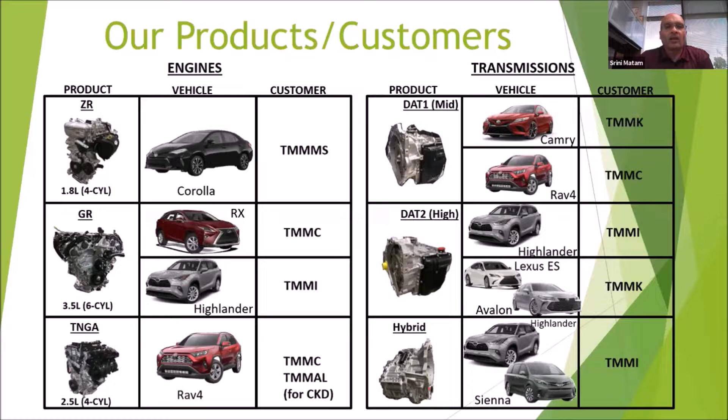First, I'd like to give an explanation of what our goals are for the environmental challenge of 2050. We have 6 challenges. The first one is we want zero CO2 emissions for new vehicles. The second one is once the vehicle is in the field, for the life cycle of the vehicle, we want zero CO2 emissions. Also within the plant that's making the vehicles, we want to be CO2 neutral.

Challenge 4 is protect our water resources. Challenge 5 is ensure all Toyota facilities and processes support a recycling-based society. Challenge 6 is everything we operate and make, we want to live in harmony with nature. That's our goal. With that said, I'm going to touch on 2 challenges and then lead into the STEM discussion.

The second challenge I want to share is the plant side, zero CO2 emissions. We invested $4.8 million in the largest solar array. You can see on the picture on the right that generates 2.6 megawatts of total electricity that we use within the plant. It doesn't support all of it, but it supports 25% of our electricity that we use.

So now back to all of that effort that we're putting in. It has a big connection to STEM careers and how we use these technologies, and how our maintenance and engineering folks support these systems. First of all, from a STEM career standpoint, we have accounting and finance related to manufacturing, information systems, skilled maintenance, and then several engineering disciplines. I'm not going to read all of it because of time. Today, what I'm going to do is touch on skilled maintenance, leading to what Hannah talked about earlier, the advanced manufacturing technician.

Hannah, by the way, I was one of the board chairs of Bridge Valley until summer this year, and then I retired, and now I have a new member supporting Bridge Valley, a great institution, and we partner with Bridge Valley to promote the advanced manufacturing technician.

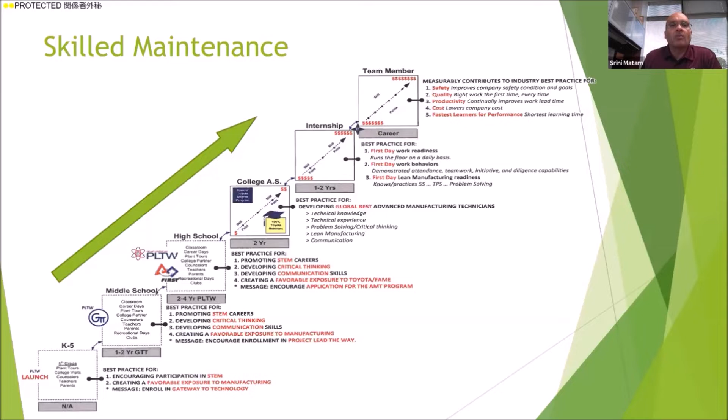I think Bridge Valley is the one that administers all of the AMT programs. So Hannah already explained about the AMT a little bit. And then you go into the associate degrees here through Bridge Valley, especially for skilled maintenance. It's called Advanced Manufacturing Technician. I'm going to go more into how that program works in a little bit. And then you do the internship.

It's a paid internship, and you become a potential team member here in the plant. Now, how does the AMT program work? Students basically work 2 full days of classwork at Bridge Valley, and then they work here on the plant 3 full 8-hour days. The instructional program continues through the summer. There is no summer break.

Here's how the weekly schedule looks. For example, on Monday, Wednesday and Friday, they come to Toyota to be on the production lines to support our maintenance folks. And then on Tuesdays and Thursdays, they go to school.

Here is the general idea about the degree program. You have general education with math, writing, science, social science, and public speaking. It's a 5-semester course. Then you get into the manufacturing floor experience with production and maintenance and so on and so forth. We also teach safety culture, workplace organization, lean manufacturing, problem solving — very important — and maintenance reliability.

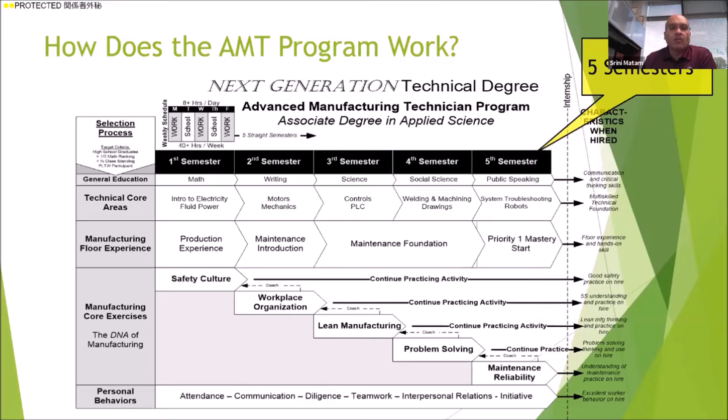So the program results, at the conclusion of the 5-semester program, students are going to get an associate degree in applied science, with 65 college credit hours and 14 months of real world experience because they've been working 3 times a week in the plant. And many other experiences highly sought after by employers — for example, problem solving is one of the key things, critical thinking, and safety.

So far we're having 100% job placement of the 2-year graduates from AMT. AMT's pass rate on Toyota's tough technical test is also 100%, along with 100% completion of the lean manufacturing core program, and professional behaviors as well. So a lot of good programs.

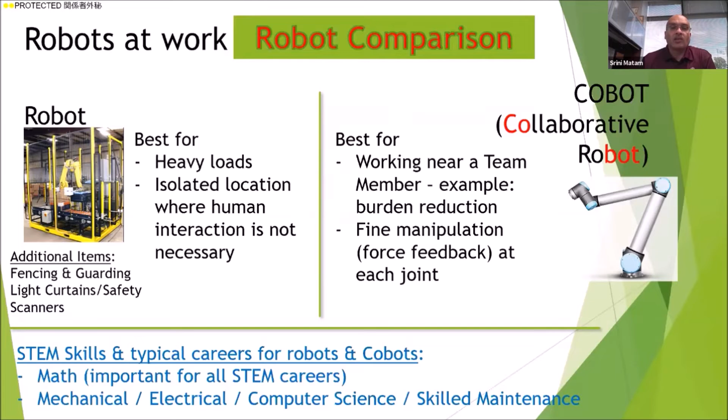Now I'm going to introduce what type of technologies we use in our plant, that either an AMT program or general STEM education through engineering could lead to job possibilities in the plant. For example, we have robots doing work in the plant. The one on the left is a heavy load robot that lifts a lot of weight, so humans don't have to, but there's a lot of need for programming these robots. On the right, you see a collaborative robot, which is human-friendly, two different types of it. For this, math is very important, along with mechanical, electrical, computer science, and skilled maintenance knowledge.

I'm going to demonstrate one of the small robots here with a video. What this is doing is wiping a part clean, so humans don't have to touch it and get cuts on their fingers or anything. This also helps glue an aluminum part to another part of the assembly. That's how this robot works.

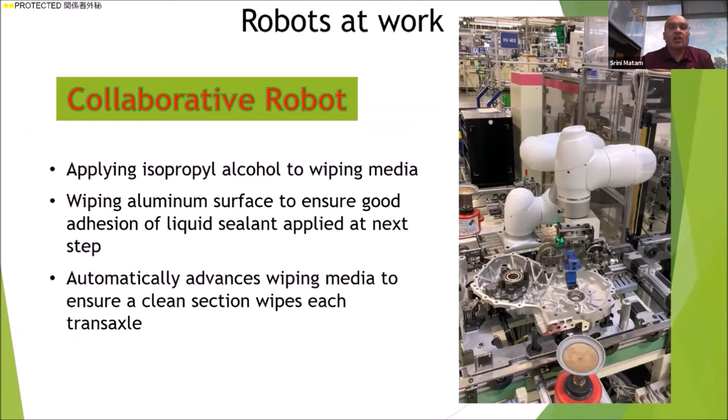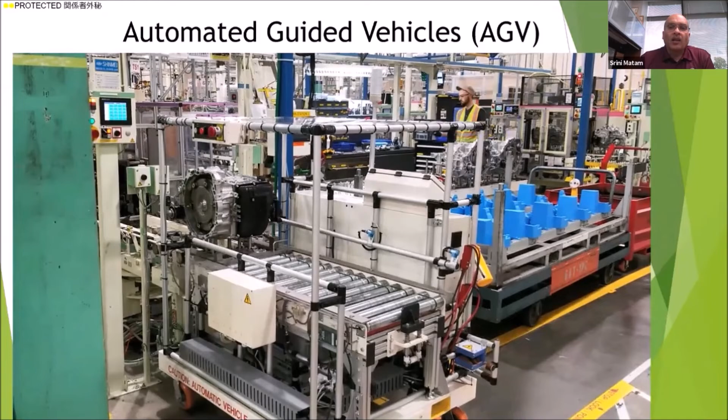There's a lot of need for programming these robots, and these skills are taught during the AMT associate degree program. Here is another example: programming an automated guided vehicle. Basically, it picks up a finished product, and once it's loaded, it automatically takes it to the next line.

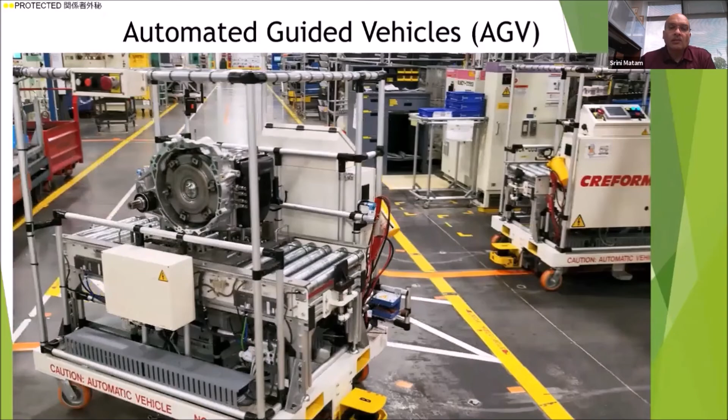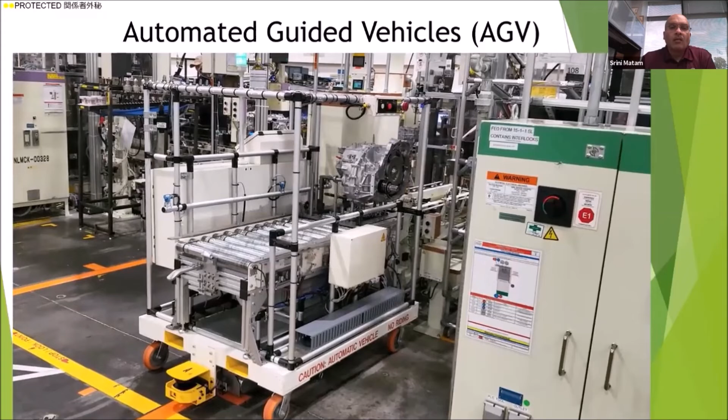So there's no human involved. Again, from a STEM education perspective, it's very important for the manufacturing side to continue to support the technologies that help manufacture products.

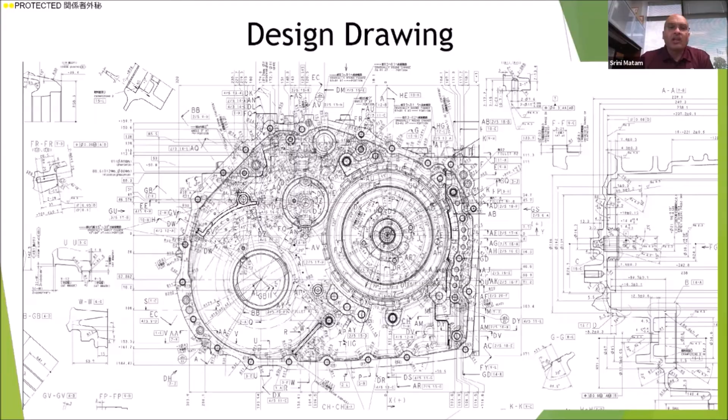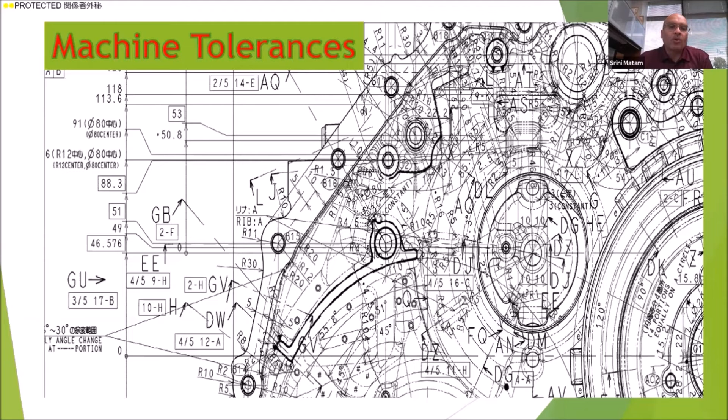This is one example. I don't mean to say you need to know what this is, but it's an engineering drawing of the part I just showed you where the robot was wiping. There are a lot of intricate details if you can see it. If you know the math and you can learn the drawing through engineering programs, especially mechanical engineering programs, students will be very interested to get involved in all the details of this.

I also wanted to explain the tolerances and machining work that goes into these aluminum parts. We use tolerances at a micron level, sometimes not millimeters or centimeters. A micron is a thousandth of a millimeter.

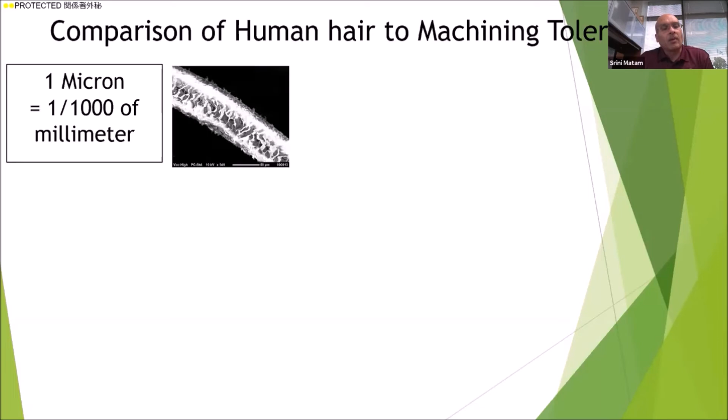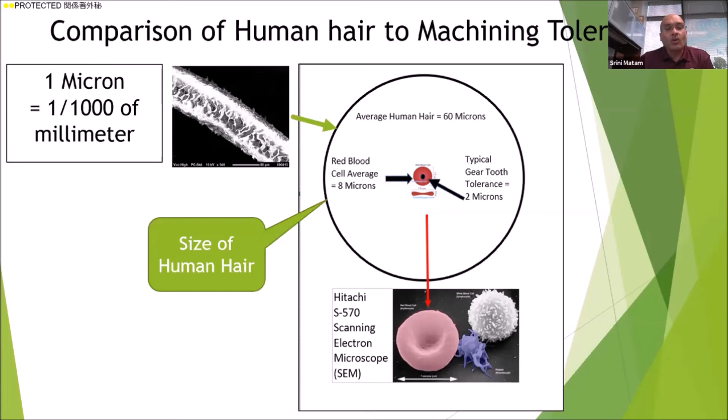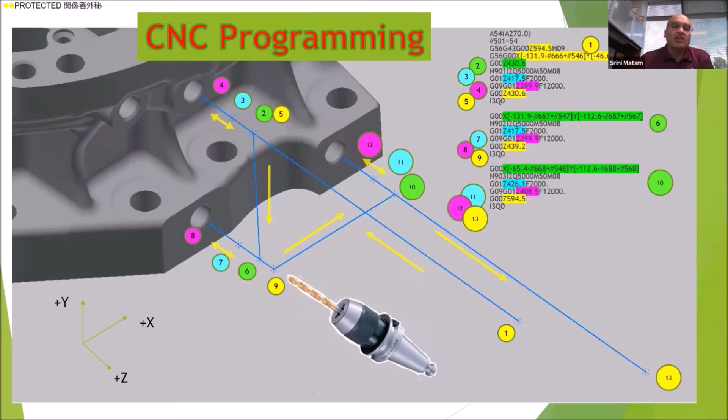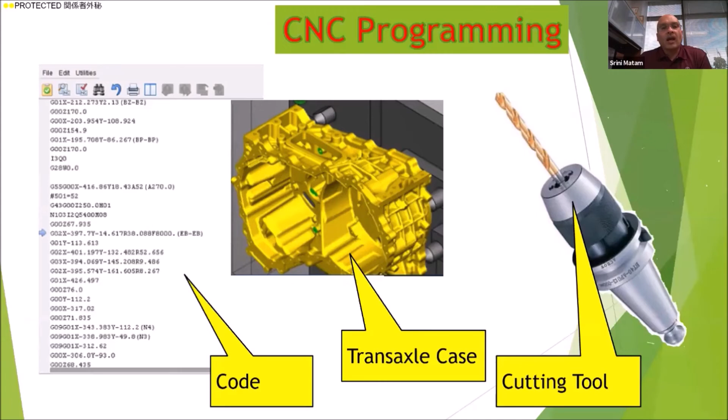You can see another image of it. The programming is on the left side, which you run so the cutting tool goes in and cuts the holes within the transaxle case, an aluminum case basically.

The STEM skills needed here for CNC are, again, math, because you'll learn the programming skills, the logic, the problem solving and so on. It deals with mechanical and skilled maintenance.

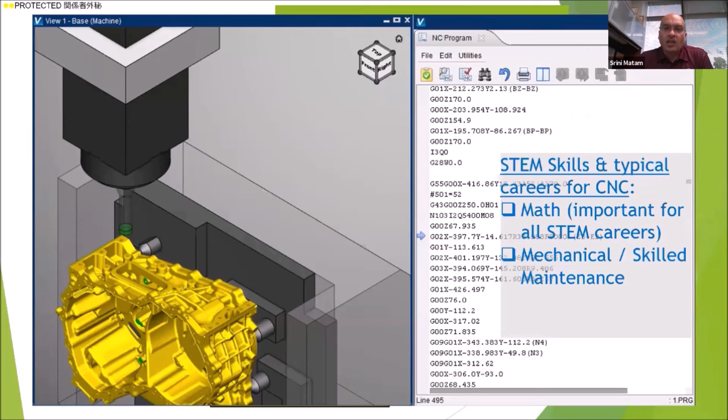3D printing is also big here at Toyota, and generally everywhere. You can see different parts held in nylon holders, which are made with 3D printing. There's a lot of programming you can learn, and drawings you can make to the tolerances, so we can print inside. This is getting really big—3D printing is going big in the industry.

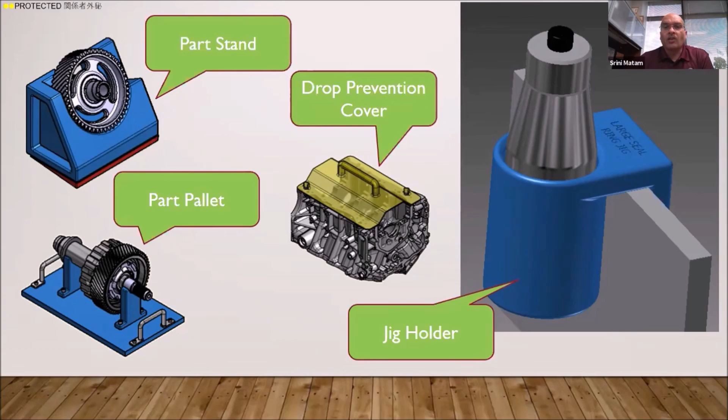Finally, how can we support at Toyota? We can do plant tours for teachers and students, and you can reach out to us. Also STEM days for students where they can shadow engineers, maintenance, quality engineering, and others. We can share the job responsibilities of engineers to give that STEM education introduction, so students can pick and choose how they want to grow in their own careers.

We can show automation, the robots I showed in the video, the AGVs, and our training areas covering the fundamentals of engine manufacturing, transmission, and general problem solving. We can also show the CAD, computer-aided design development, and 3D printing. That's all that goes on here. We're excited to share anything with all the teachers and students. Let us know if you need any help. That's all from me, Kim.

Thank you, all right, thank you so much again. And you brought the robot to our last event in West Virginia, and honestly those diagrams are incredible. I really enjoyed that part. Thank you so much for presenting.